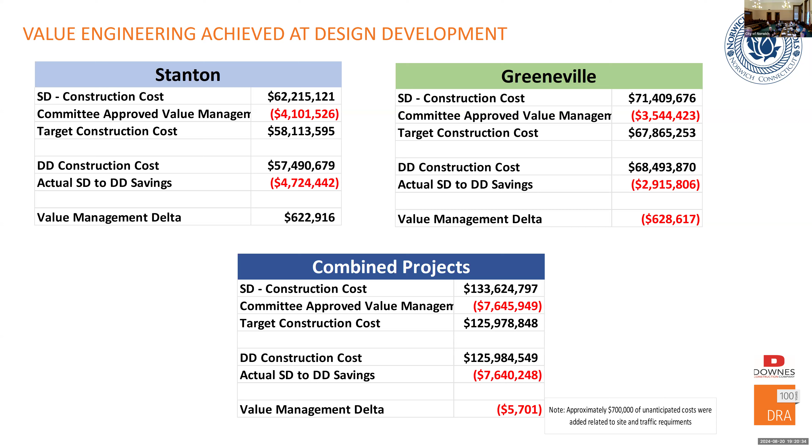There were a couple items that still were held outside of this - we said we had to come back and revisit for additional cost savings. So if you go to the next slide, we had four items. The first was removal of destratification fans in the gymnasium. We all collectively talked about it, and we all said it was a great thing to do.

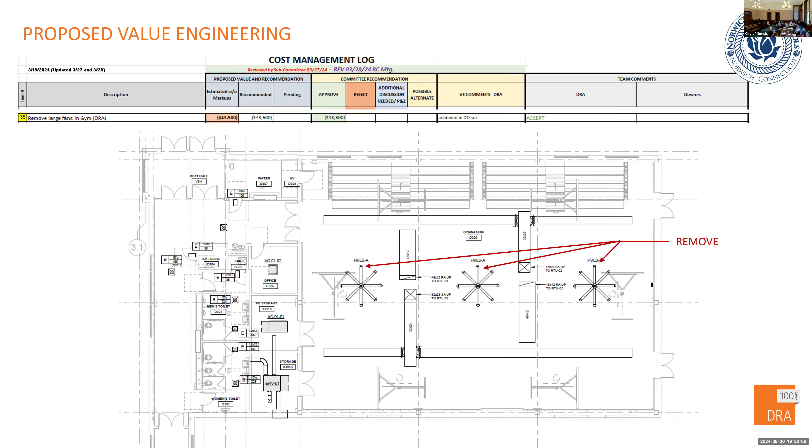Unfortunately, it still remained on the drawings and was priced. We're taking them out of the set. The next item below that, and there they are coming out. That's the same sketch that I think Greg forwarded to our consultants.

Storefront in lieu of window systems. Back in March, the building committee voted to take all of the operable windows out of the building. So now we have fixed window systems in the building. With that realization, there's another value engineering potential: moving from window system to storefront. We've had success with this on other projects, and it's something we're recommending. We'll work through with the cost estimators to help you understand potential savings.

Yes ma'am, what is it? Storefronts - window systems are typically a manufactured product. They arrive from a factory as a delivered unit and are popped into place as a unit. Storefront can be stick-assembled, meaning it might be done at the site, or it might be pre-manufactured to a certain level in a controlled environment and brought to the site. The folks from Downes can speak more to it, but in terms of pure potential cost savings, it's another area we can consider.

It's assembled on site. It's a very similar product - quality and all this is just as good. It's just an easier way, and you don't have problems ordering the piece and it not fitting.

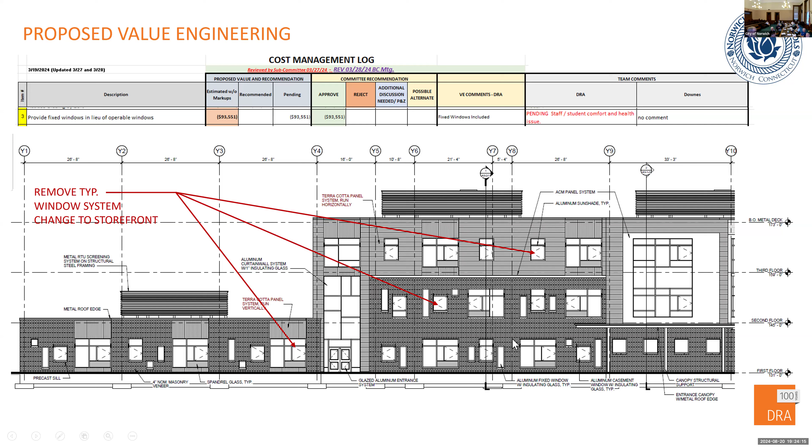Let's go to the next slide. Another item we identified in our DD estimate to consider is the elimination of exterior sunshades - not the window controls on the inside, but exterior shading on the south face of the building. At each of these heads, on south-facing walls on both projects, we had cantilevered sunshades to create shading across the window. Our note here, from the March building committee document, said pending high performance building standard component testing.

We had them in because it's a good idea and it helps us get a high performance building standard point, which helps with our reimbursement from the state. We've confirmed with our envelope specialists that we're able to achieve the high performance building standard point with the specified system. After consideration and engineering review, we know we can remove these, and that's a recommendation we're bringing. The glazing will take care of that - the south-facing windows will look the same as all the other glazing, but have different characteristics for shading and R-value coefficients.

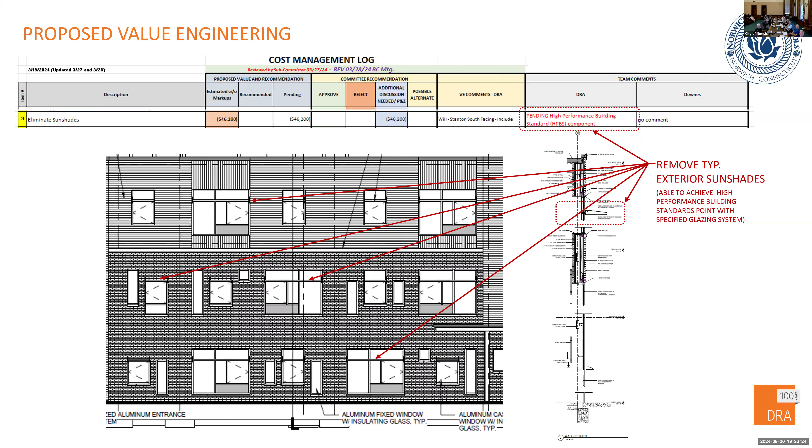Removing that, how does it affect the HVAC cost for running it? That's the point - the shading was there because we had to shade further to achieve what's needed for energy cost on the rooftop units. With the actual glazing material being applied, that's not necessary. It doesn't hurt us, and it saves us about - well, these guys will talk numbers - but order of magnitude about $100 grand. It's a good number.

I mentioned there's still the internal shades - oh, absolutely, we'll have controls on your windows. You won't have to worry about a student being affected. That's not what I'm worried about, it's more about the projector being visible depending on the lighting. So it's more like a German-type window with a shade built in.

No, these are interior mounted. They are perforated, so you can still see out, but they shade significantly. Same as Kelly right now. Yes, you're familiar with Kelly.

And the last one we had, under our continued cost management, was building footprint reduction. If you go to the next slide, that was one of the cost saving measures. We reported where we were at the time for both schools. We also, in conversation with CSG, understood that one of the art rooms was considered not needed going forward. It was asked if we could try to get it out of this program.

You know, I have a team. When we're in schematic design, there's about 6 or 7 of us working right now. In construction documents, there's probably upwards of 50 to 60. I don't know, Greg, am I underestimating that? But it's that kind of order of magnitude. There's a lot of people that really want to take a swing at me if I say certain things, and this is one of them. Don't give them my number, give them Bonnie's number. She's vicious. Bonnie is our project manager in-house. She's very capable, that's the word for it.

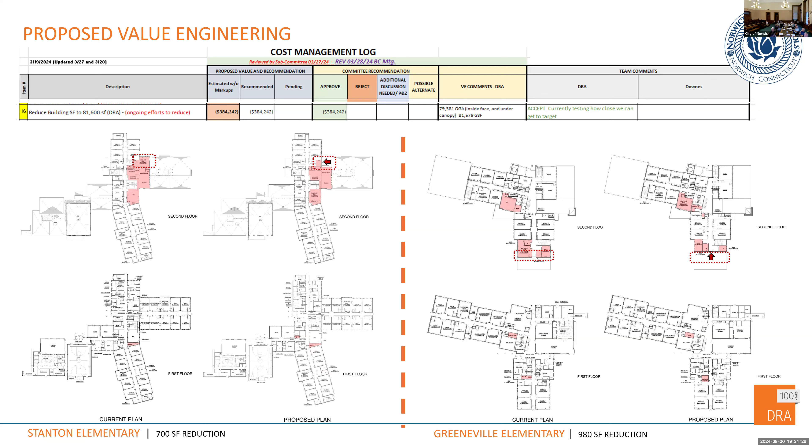Thank you, Susan. So these 4 items are things that we would need to approve at this point. We would like approval because we're at the end of the line here, we have to move pretty quickly.

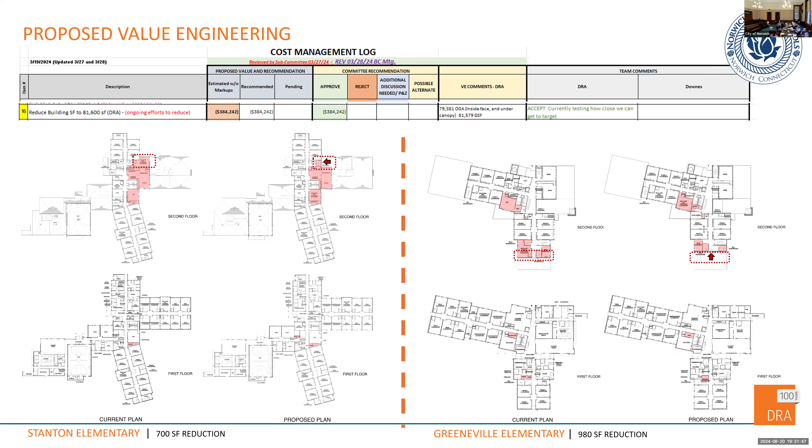If we can go back, just one sheet back will give you the listing. The first was the destratification fans at the gym. The only comment I would make is that every school I've ever done, those were proposed at one point and ultimately got removed, because they're massive fans, stuff collects, dust collects, they don't get used, balls go up into them.

So what we've got is: remove destratification fans, the storefront window system, eliminate exterior sunshades, and the building footprint reductions. So I would be looking for a motion to approve. Make those the motion, by Stacy Gould. I'll second, second by Greg.

Any discussion regarding the 4 items? Just one question, why were the fans put in the first? We work on plenty of educational buildings like Mike.

This is something where the destrat fan in a large volume space helps circulation of the air. So you get the hot air rises, cold air wants to drop. It's a good way to try to force the hot air out to the outer walls, drop it down the walls, and then recirculate it up, and it creates a kind of convection. So at any rate, it moves the air, it mixes the air, and therefore you're able to take advantage of some of that heated air up at the top.

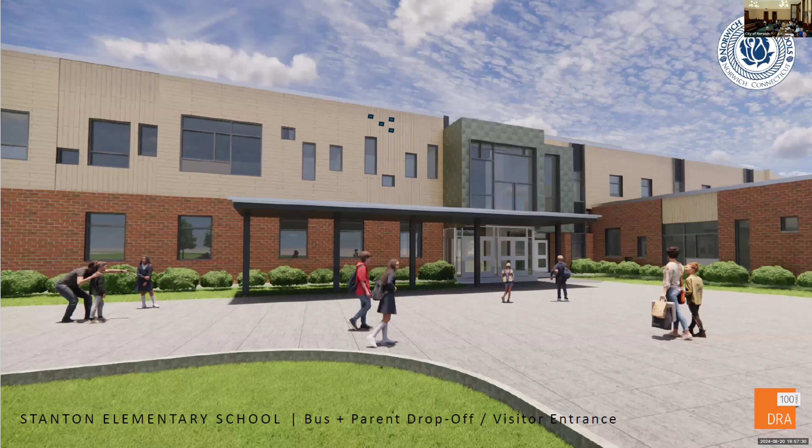Oh, here we go. So, fluorescent green—no, you guys have seen this previously. This is kind of an entry. What I want to do is walk in the doors now.

So if we go to the next slide, this is the image of that main lobby space that you've seen in 2D in the design development drawings, etc. It gives you a sense of the walk-off mat, flooring material. These are phenolic panels, which look like wood, but it's a super hard wearing material—doesn't dent, doesn't chip, doesn't get gouged. We use them at corner situations for that kind of protection.

The wave element is kind of a shark takeoff, so we're suggesting water. These are actually an acoustic treatment, a panel system that helps us absorb the sounds of this space, because as you can see it's a pretty hard space, but that's the sense of walking into the space.

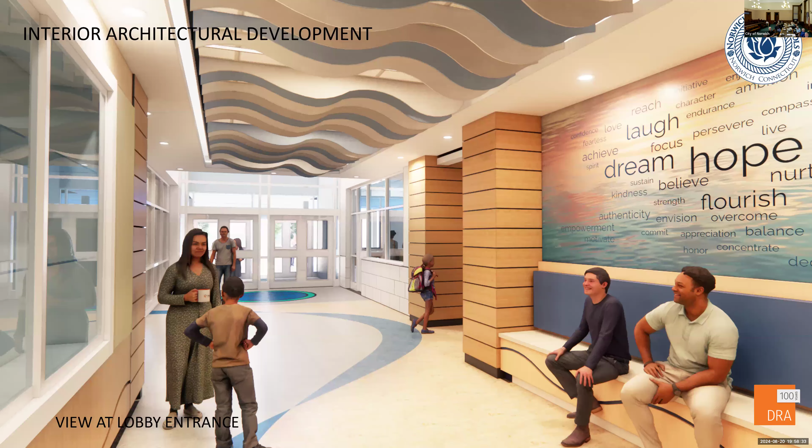Now we're going to walk down here, and if you hit the next slide, we're looking back towards that entry point where we just walked in. This is administration off to this side. This is a small lobby space in that main entry at Stanton School.

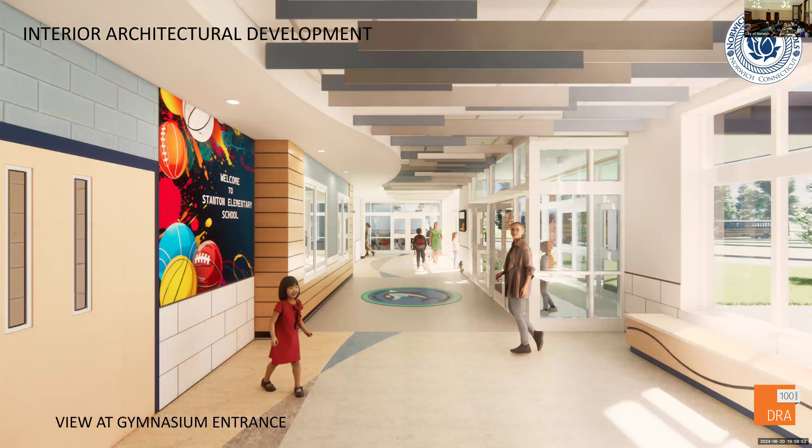The next slide will take us to a lobby space, but this lobby space is over at the gymnasium, off of the bus loop—there's an entry point there. As you all recall, this can be segregated off from the educational wing and gives us good separation, so this is a great after-hours, weekends, community-use type space. A lot of glazing on the wall gives you a good kind of light, airy feel.

Again, a more simplified version, but the same idea—baffles to help control sound in this zone, hard wearing flooring materials. We do have some bench elements occasionally, again introducing a little bit of a waveform, hard surface seating area there to ensure its longevity and ability to stand up.

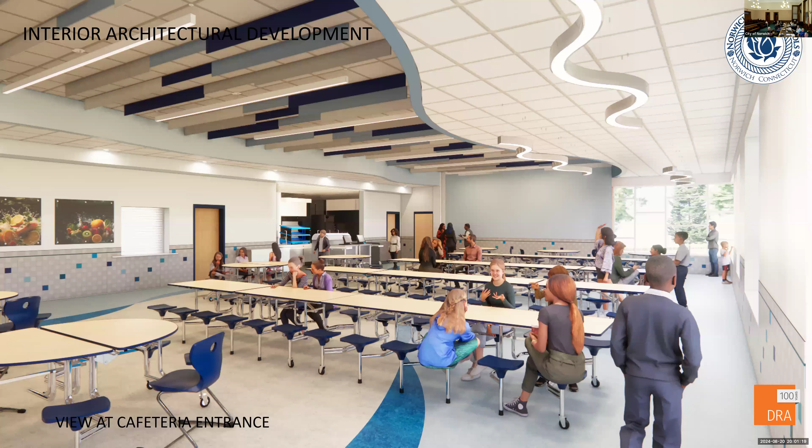So we're hungry after work. We are at the entry point looking out into the space.

So we do have the servery area. Dish drop is over to the side. Some nice lighting, and again, trying to deploy simple systems to help with the dampening of sound in the space, but also introduce some color. Let's go to the next slide.

We're going to stand at the other end and look back. This is the door that I was pointing to when I thought I was in the lobby coming in. So now I'm looking back at that door, but you can see this whole wall is a glazed wall, and beyond that we have a good amount of color on the wall on the outside. So it's playful, it's cheerful, it's bright. We think it's going to provide a great opportunity for gatherings, etc.

I'm just curious about the tables. I'm sure this is down the road, but is this something you have in mind, the particular style of table? We're working on furniture. What we do at this point is use placeholders, and then we'll put the whole furniture package together and get input from administration.

I usually hear a lot of complaints from maintenance about tables. We have chatted with maintenance at this point. As Greg said, that's going to get into another iterative step of conversation, but these are a folding style table that collapse together. The seats turn sideways, it stands up on wheels and they're pretty easily moved. Yeah, we use those in prison. That's part of the problem that I think Greg is getting to.

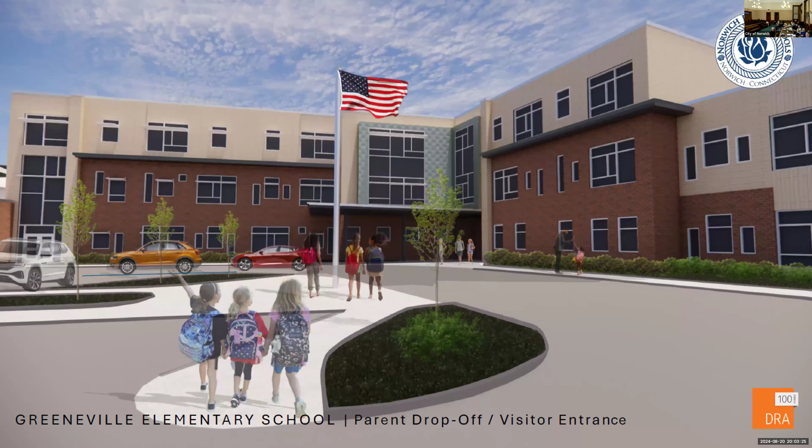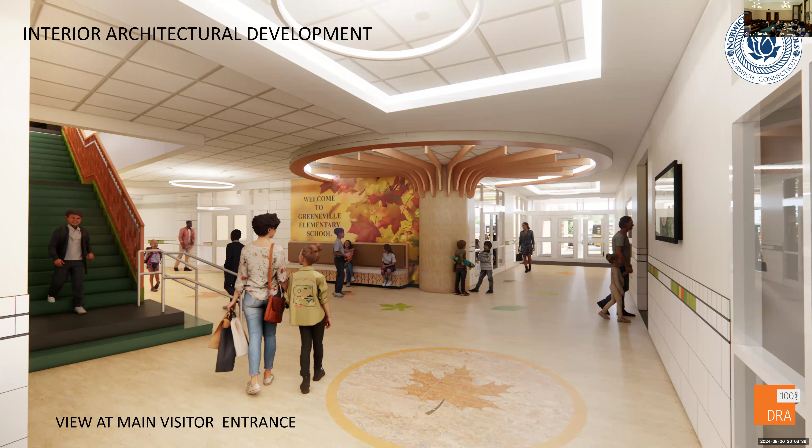So next slide, we'll head over to the Greeneville School. And we'll walk in that door, hopefully it won't surprise me - there we are. So at Greeneville, you recall we just came in the main visitors entry door. We look straight across, that's the bus entrance door. To the right of me in this glazing is the administration. So you've gone through that kind of entry sequence.

In Greeneville, we're using a lot of nature forms. This is something that's built into a hillside, has a great tree canopy. So we took our inspiration from that, but within the linoleum you see some tree leaf forms cut into place and that color palette. If you go to the next slide, we're standing under this tree element.

That's the stair that moves its way up. You can see the guardrail system and it's reflective of kind of branches and trees. But it gives you a sense of the tone of color and the brightness of the space. Let's move to the next slide. We're going to step up.

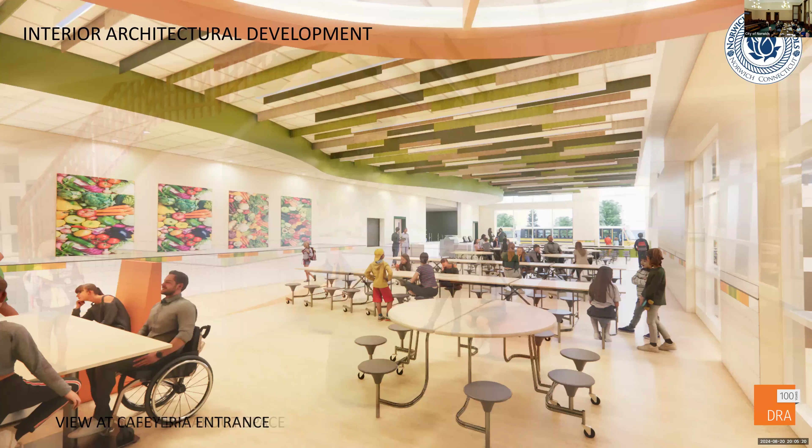Thank you. In the next slide, we're going over into the cafeteria, and this cafeteria has a lot of the same feel of what we shared with you at Stanton. Uses kind of the tree form tones. You see the view out - there is a bus because that is where the bus loop drop is. Down this side, this is where the entry into the bus loop is. This is the serving area, so children can queue up along that area, get their food, eat, drop for washing and recycling.

Next slide, we'll go to the other end and look back. Similarly, we try to introduce a good amount of glazing at the corners. We use art, which is on a phenolic panel, to get good color into the space, but it gives you a sense of the environment. Let's go to the next slide. This is the library space.

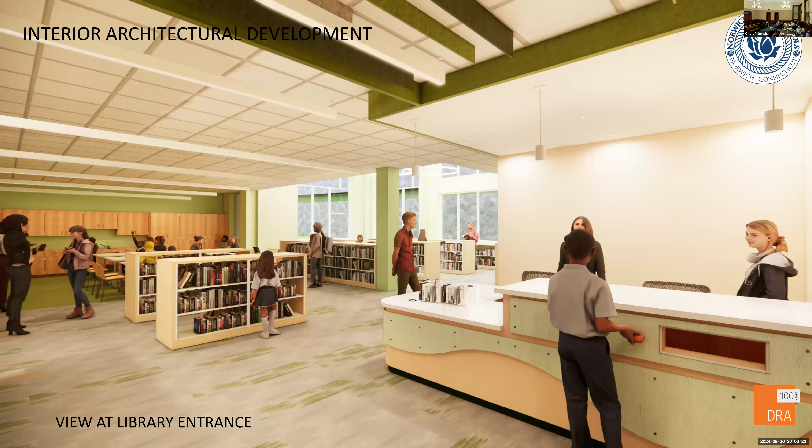So we just entered in immediately to the right, which you'll see in the plan is kind of the main reception of book drop, etc. Directly ahead is the makerspace in the green zone. And to the right is stacks and some soft seating out towards the window wall.

If you go to the next slide, we'll step into the space and we're looking into the makerspace that's been identified for this area, teaching wall, cabinetry, storage. We do have some sinks in this, which is something we've worked with administration to understand. The sinks are there to support the STEM learning that happens in this space.

We do have, this is the area where we have the ceiling mounted reels, and they have not shown up in this as of yet. That's how we're getting the power down to the student tables, which might be grouped together for those type of activities that would need electrical support.

Next slide, I'll show you the breakout. This is in a corner of the library, just across from the main reception that we chatted about. There's a corridor system just on the other side. We open it up, so it's that idea of having the space kind of introduced to students and introduced to the public as they use the circulation in the building. But it gives nice, comfortable areas, like a storytelling area for young children.

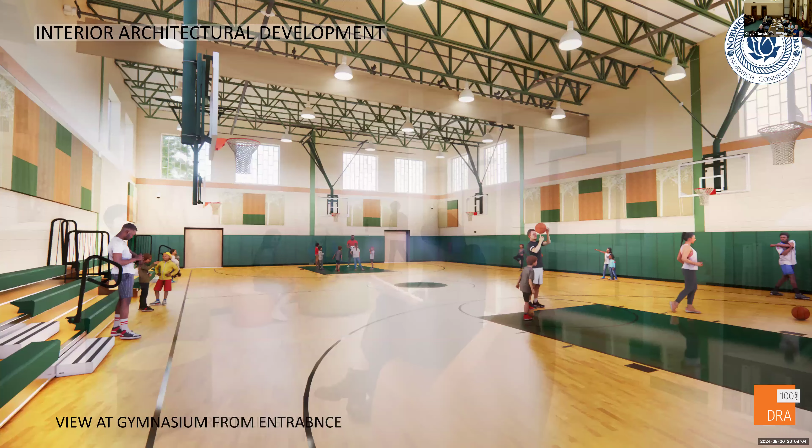We're back at a gym. This is the view as you walk in, main entry to the gym. The system that we're using in both schools is a Kalwall system. It has like a rice paper film in it, but it's made of plastics. It's not actually rice paper, but it gives diffuse light. It gives beautiful natural light to the space without hot spots on the floor or getting in the eyes of competitors if it's being used in competition. It's in Stanton, we've been in the Stanton gymnasium.

Okay, it's on the west. We have similar applications in pre-K to 8 schools where the lighting system just doesn't get used during the day because it's that effective in terms of making a natural light environment.

And the next slide will take you to the other end where coach is giving them skills in terms of free throws. But it gives you a sense of these are...

Say again? They're acoustic, but what are they made of, Greg? The wood material. Heck, I didn't know what those was. You didn't study. I didn't study. Oh gosh, okay, anyway. Heavy duty, yeah, they are heavy duty hardware and made of basically a wood fiber material. We put colors on it to create pattern. Mr. Hall's familiar with these, gym teacher won't be wearing cleats either. Yeah right, we do have some fabric wrap panels associated. That's a great pickup, I love that.

And I think that's the last of our package that we had to share. So, quick tour of two buildings, and just curious, any thoughts, feedback? Can't wait to see them. Me too. Me three.

One of the things that we want to talk about today is the value management. As you know, our first process, we went from SD to DD. We probably did one of the larger value management processes that we've had to do in a long time, from those stages, considering the budget we were trying to meet.

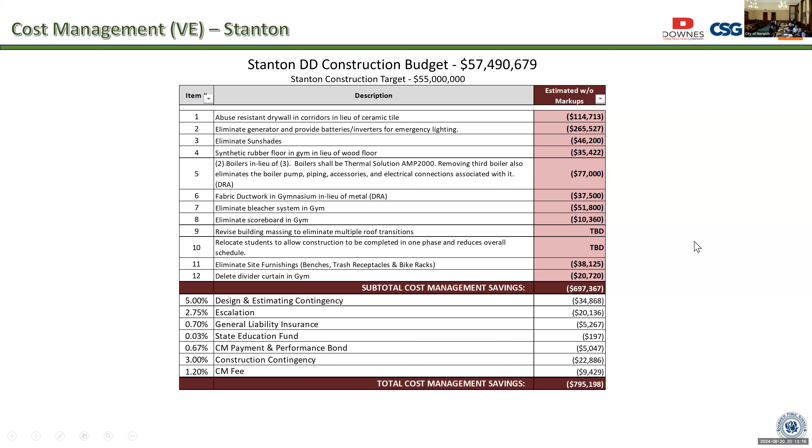We should accept 12 for sure. TBD is like whatever number we choose.

That one's still working. I think there could still be some significant cost savings there once the engineers complete all their studies. I was gonna ask you about that. Yeah, I haven't had any feedback yet on that. I don't know.

Jim, if y'all had anything from the engineers on the retaining walls, any kind of feedback yet on that? We don't have a final report yet, full final. We did release a significant amount of information that you have and we shared, but that is still making its way through finalization.

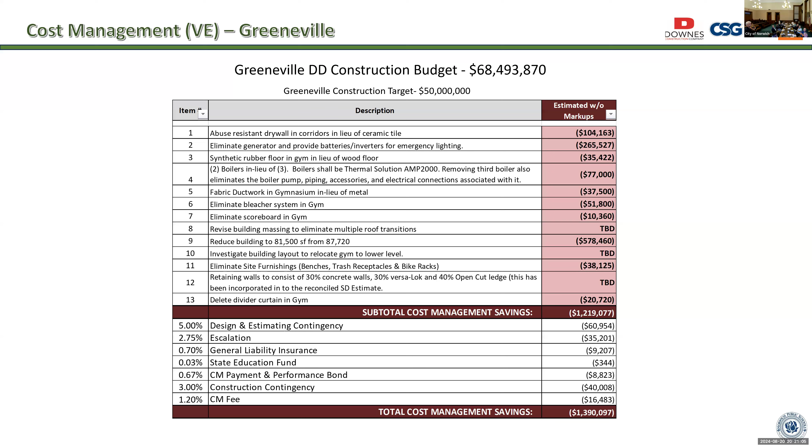All right, any other questions? No? Good. But they're good.

All right. Yes, no, no, we lost it. Nah, I just... Joe's still there. I'm here, yeah. Seemed for a second we lost the whole feed.

Teachers 9,500. DRA Greeneville 10, 241,305.56. Stanton number 10, 187,697.86. And Downes, Greeneville number 5, 16,000. Stanton number 5, 16,000.

Make a motion to approve the consent agenda, second by Greg, no discussion on that. Joe, yes. Stacy, yes. Greg, yes. Mark, yes. Cindy, yes. Bill, yes. Peter, yes. Greg, Mark, yes. 10-0. All right, is there anything else we need to bring up tonight?